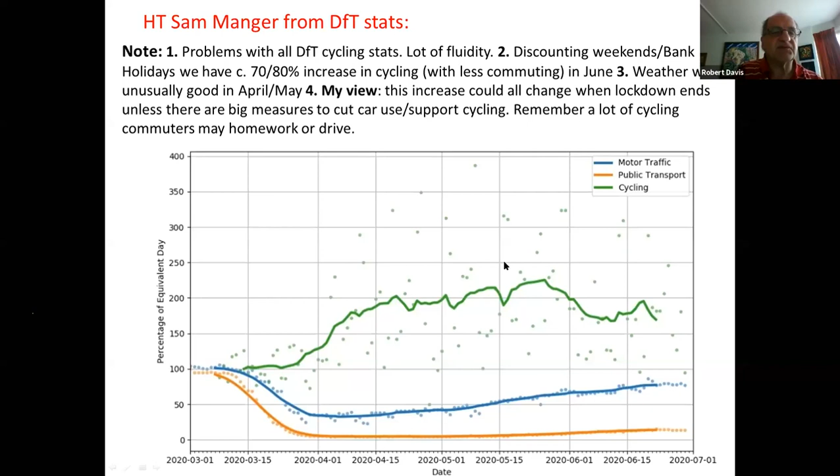Remember, the weather was unusually good in April and May. My view is that this increase could all change when lockdown ends, unless there are big measures to cut car use and support cycling, because a lot of cycling commuters may end up home working or driving. But that's some interesting background stats.

Now, general news, bit of good news. Part 6 of the Traffic Management Act 2004 was activated by the Minister, and that relates to moving traffic offences, outside London. Someone like Mark, if Mark is on board, or Phil, can explain to you exactly what that means. That's what the red asterisk means. So that's a bit of good official news.

The rest of it is still delay. The updated National Cycling and Walking Plan was due for June. The minister responded to Fleur Anderson, I think, member for Putney, saying this summer. The inspectorate we were promised, haven't heard anything more of that. The active travel commissioner in charge of it, again, we haven't heard anything about it. And the update of Local Transport Note 2/08, again, that's this summer.

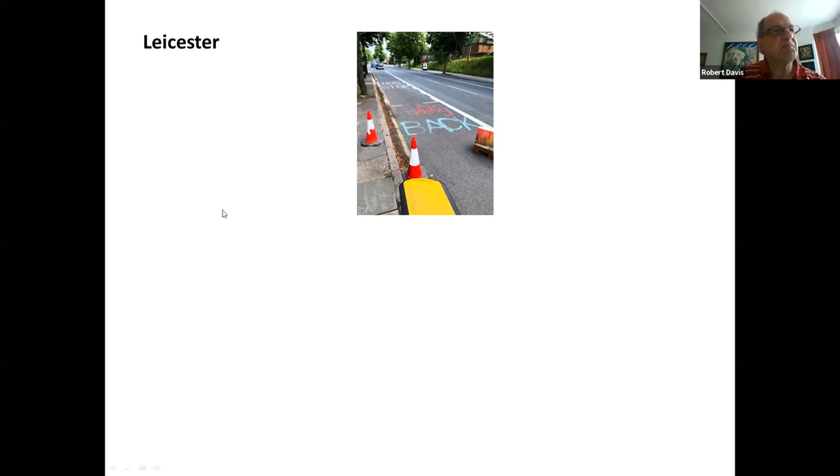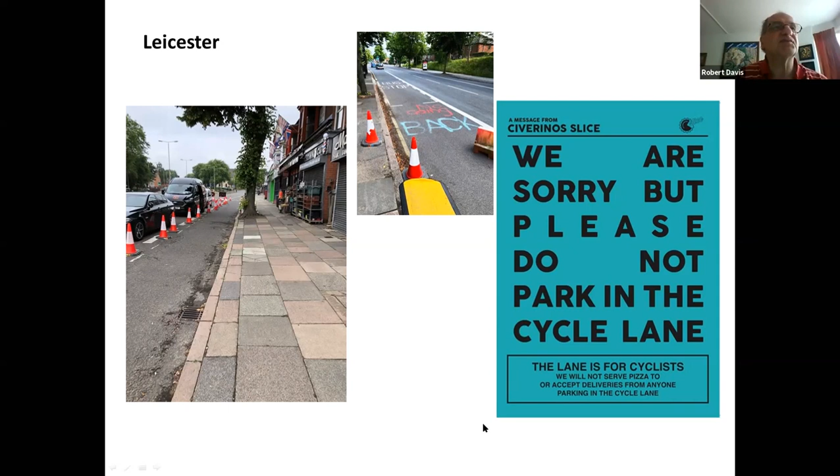Now two other things. Beaumont Leys Lane - I've seen a more recent photograph of this, but here you've got the cylinders and you've got parking on the footway, and presumably locals are driving in through the cylinders to park there. Maybe that's the reason for these cones. I don't know, but the cones do seem to narrow the cycle lane.

Here's an alfresco dining space on the Golden Mile. Various bits and pieces about more space for dining coming out this week.

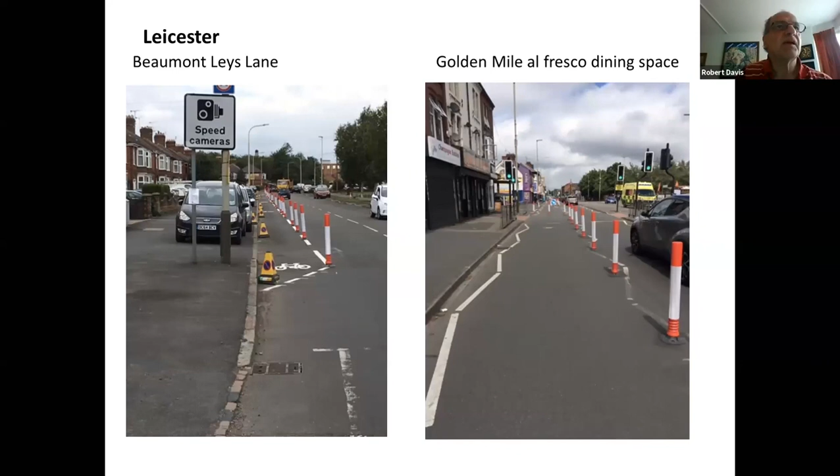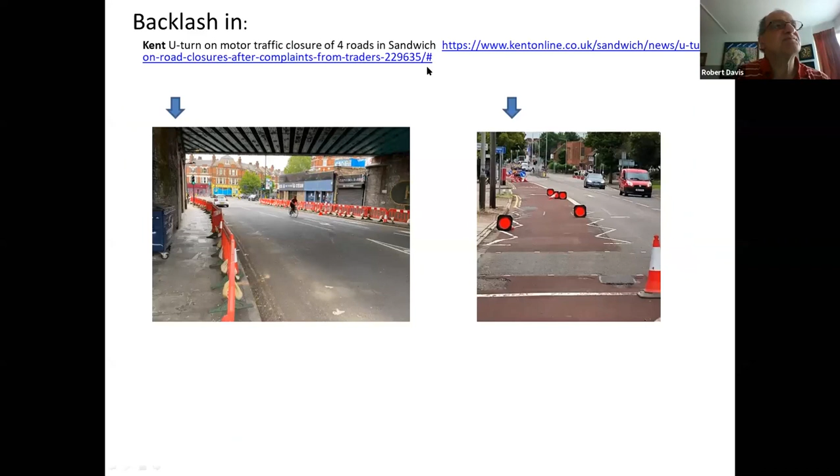Okay, now some backlash stuff. Kent U-turn on motor traffic closure of 4 roads in Sandwich - that's not good. Tower Hamlets, some planters which were put in right at the beginning and signs were taken away, they've now apparently been put back. There's a long story about how it's causing extra traffic to go through a neighbourhood that had been planned for a low traffic neighbourhood, but it's now going to be done differently and it's going to be consulted on. It's a long complicated story, but it's an example of some planters being moved and signs taken away, which we'd seen a few weeks ago in Hounslow.

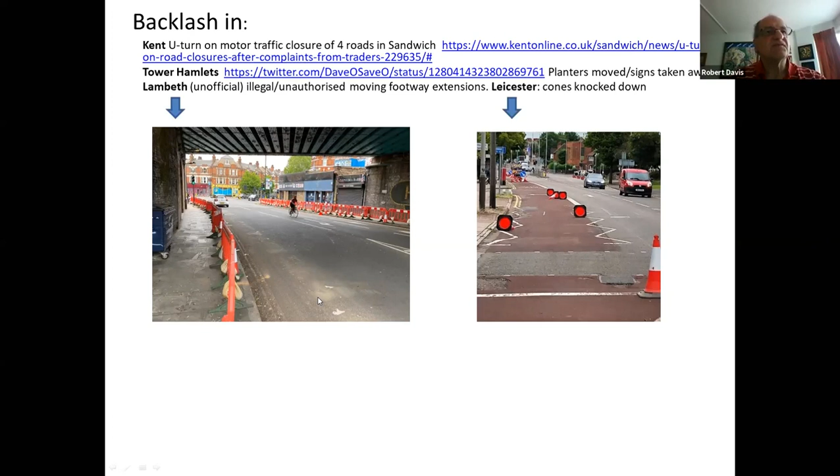Also in Lambeth, something quite interesting happened. You remember one of the first footway extensions was under this bridge at Herne Hill. One day last week, some eagle-eyed activists noticed that these barriers had been put back on the footway. So they contacted the council and said, why have you done this? The council said, we haven't done it, it's been done illegally. So they've now been put back - you can see where they were. So, you know, the price of liberty is eternal vigilance, you have to keep an eye out for that.

In Leicester, some cones have been knocked down either by cars or on purpose, we don't know. I've heard that in Ealing some of the cylinders have been bashed. So bad stuff is happening there, either accidentally or otherwise.

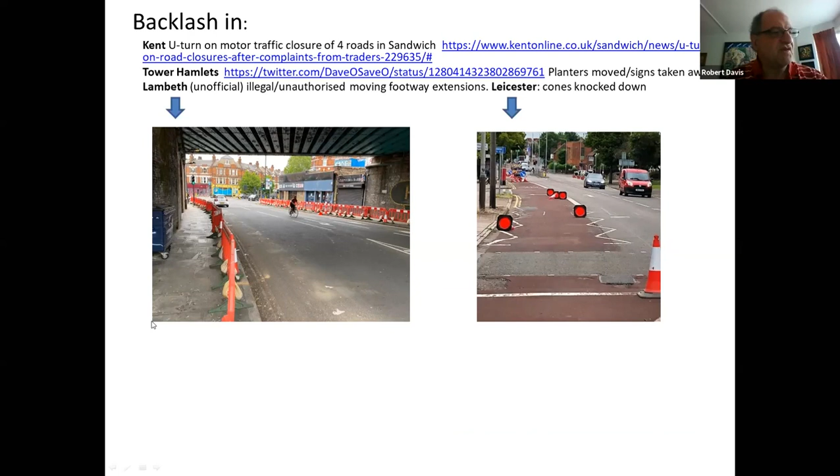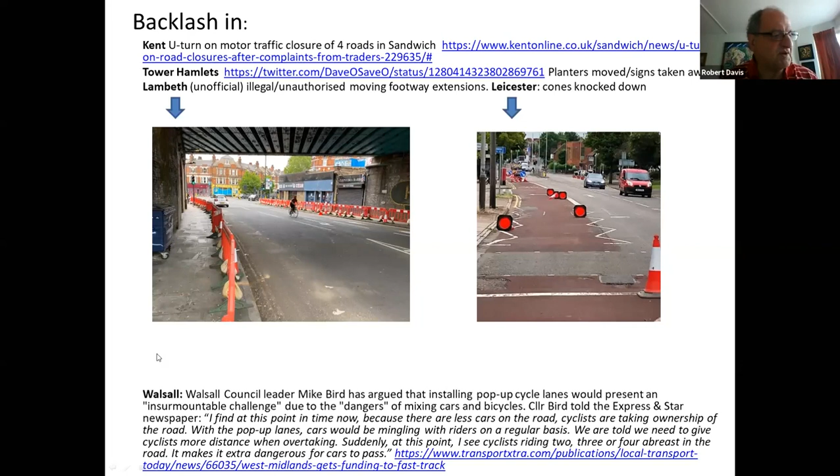Now, I don't know if you know Bez, Beyond the Kerb. He produced - he's still around - a t-shirt which said ride a bicycle and upset the idiots. So here they are. He is the council leader of Walsall, the one council in West Midlands Combined Authority that isn't doing anything. He's argued that installing pop-up cycle lanes would present an insurmountable challenge, due to the dangers of mixing cars and bicycles. Actually, the cycle lanes are to not mix cars and bicycles, but never mind.

I find at this point in time, because there are less cars on the road, cyclists are taking ownership of the road - we wish. With the pop-up lanes, cars would be mingling with riders on a regular basis. We are told we need to give cyclists more distance when overtaking. Suddenly at this point I see cyclists riding 2, 3, or 4 abreast - you don't actually, that's just photographs taken funnily, and you're making it up in the road. It makes it extra dangerous for cars to pass. So don't pass them, you idiot.

And Reigate, yes, the Crispin has been well publicised. Crispin Blunt MP was appalled at the predicted traffic chaos in Reigate - haven't actually seen that. Businesses complained and the pop-up cycle lanes were pulled on the 5th. So there's a bit of backlash.

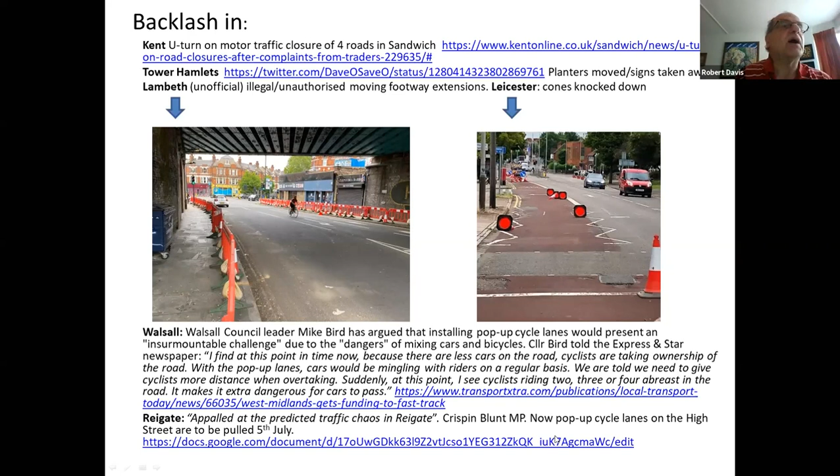Now, a bit of ultra backlash against a low traffic neighbourhood in Ealing. You may have seen this on the news - this is on my old patch, West Ealing. A tree which had some problems with its roots, very shallow roots, just fell over and was recorded on a dashcam. So it's nothing to do with anything the council done, or low traffic neighbourhoods, or anything.

But the MP, Rupa Huq - sister of Konnie Huq incidentally, if you remember her from Blue Peter, and someone I'd communicated with when she wanted some cycle parking at home when I worked at Ealing - put this up saying, scary incident in South Ealing, luckily everyone unscathed, makes this proposed madcap scheme - that's the low traffic neighbourhood - that will gridlock the hood, notice the hood, pretty edgy wording there, and cause mayhem for emergency vehicles even more ludicrous.

And there's a petition there. So here's an intelligent woman grabbing hold of something that's got nothing to do with anything and using it as an excuse to say we mustn't have a low traffic neighbourhood, which almost certainly wouldn't cause any mayhem for anybody, let alone emergency vehicles.

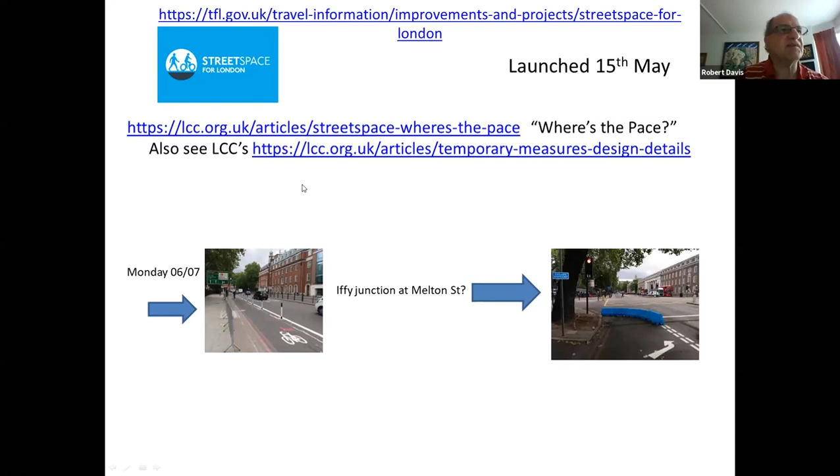Okay, here's London. Don't forget the story's a bit all over the place - do read these LCC articles, I've mentioned them before. On TfL schemes, I was taken to task for being a bit too rude about what had happened last week. Hampstead Road lanes are protected to some extent, and there are extra lengths of protected lanes in roads leading to Hampstead Road. So Hampstead Road and surrounding schemes are a bit better than I might have given the impression of.

And also Euston Road, 660 metres is due to be installed, not just 200. And there's due to be one lane on each side now - that means going down from six lanes to four.

And this was yesterday - here are wands, or cylinders more like, going in. This is eastbound, nice wide cycle lane, got a rave review from Brenda Puech.

Something a bit - this is going this direction, Melton Street, which is the old entrance into Euston. This is a new livery for street space. It's being blocked off - I'm not quite sure why that is, but you have to come out of the lane, go there, and then, or else you can hop off the bike and go across. I'm not sure why it's like that.

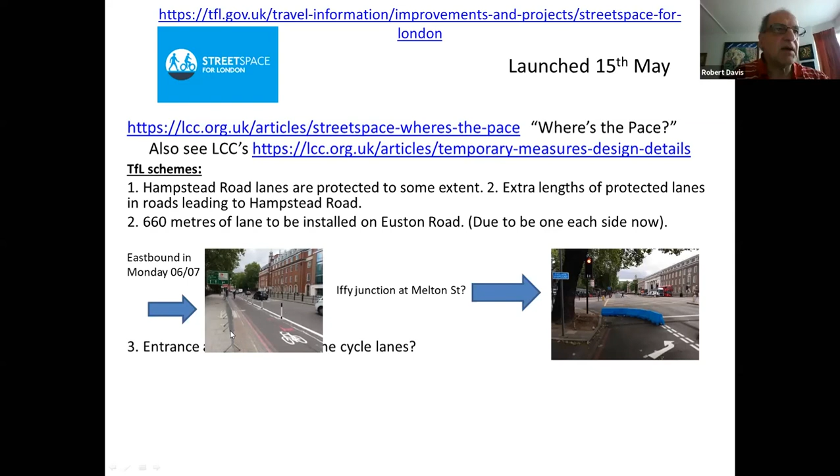Yes, Park Lane, still a bit of a query, not sure about entrance and exit to them. I'd like TfL to get on with trying to do something about Regent's Park.

General TfL policy - Hammersmith Bridge reopening to motor traffic has been paused because of lack of finance. Silvertown Tunnel we're still complaining about. We haven't got smart road user charging on the agenda.

We should have. We want to know more about having good quality cycle lanes so that you don't get left hooked. And what about where there are no cycle lanes and extended footways? So there's still questions about the quality and monitoring required for the temporary infrastructure going in, which we'd like to see talked about.

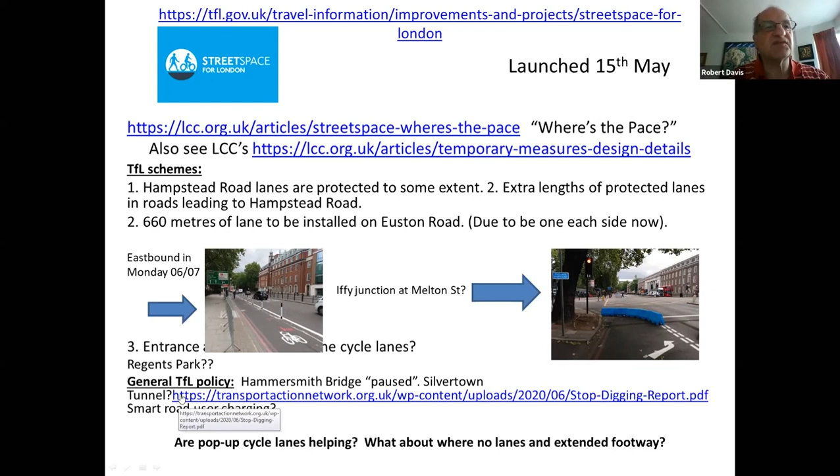Okay, now there are due to be six overall London allocations, a bit complicated, mixing with stuff directly from the Department of Transport. It's taken from Laura Laker's articles and blogs. This is the link for each scheme in London - go to each scheme, you can see there.

Now, what I've noticed is a lot of this is going on school streets, which are good, great stuff, school streets, well done to the people there. But the bad councils who don't really want to reallocate road space seem to be using them as a way of getting funding. And I'm just a bit worried that there are these people who really need to be told off forcefully, who are saying, oh, well, okay, we'll have 3 or 4 schools out of their 30, 40, 50 that will get temporary road closure every day, a couple of times. And that's not really what we should be talking about. We need something more fundamental than that.

Here's what's happened with the boroughs under what I think is the 5th of 6 allocations. There's still one more tranche of allocations, quite a big one, to come later this week. And that could be the game changer for London.

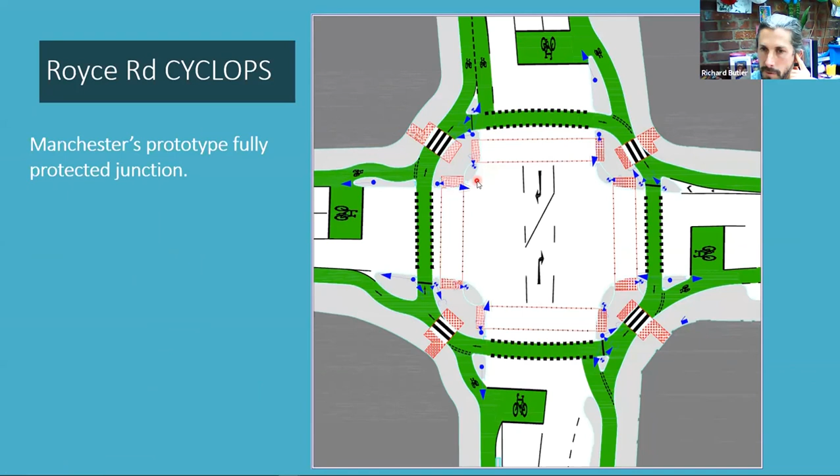There's Royce again, sorry about this. This one is a slightly skewed variation of Royce. It's actually essentially the same, but a similar kind of scenario. Sorry, I should have done my homework here, really.

That's the scenario where we can get a diagonal crossing. So you can see straight away the benefit of the orbital cycle track is that you can do more complex things inside the junction. This has got a diagonal crossing, which you won't be able to do if the cyclists were on the inside. So that's one sort of variation in terms of complexity.

This is the Bolton job that's being switched on, hopefully within the next few months. It's being built as we speak, and this definitely has a more complex internal arrangement. The cycle track goes all the way around the outside, that's the key feature. The Cyclops goes all the way externally, and it's actually quite a skewed crossroads, this, where the side arms run separately.

In terms of getting this to work from a business case and traffic capacity perspective, we needed to minimize the impact that the pedestrian phases had on the junction, hence we required these triangular islands, staggered islands, and whatever else for pedestrian traffic, but we still managed to get the cyclists around the outside. So again, that's the sort of key feature there.

Because the cyclists have shorter intergreens compared to pedestrians, since they're moving faster, we can allow for the cyclists to go across in one entire movement, from one side of the carriageway to another. We can cater for those in terms of timings, where we won't be able to do that with pedestrians. So in terms of junction efficiency, we might have to stagger pedestrians, but with cyclists, we can go straight away over in one hit because their intergreens don't have to be quite as onerous as pedestrians'.

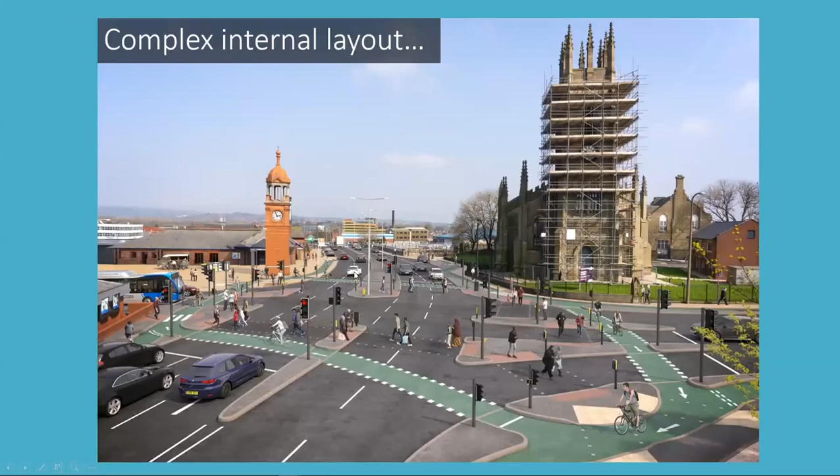While you're there, I've just been looking at the questions that are coming through. We've got a professor on the line who'd quite like you to talk through the staging on the Royce Junction, particularly the funkier elements that you're doing with how cyclists are detected. Is that okay? Yeah, no worries.

I'll bring up an image of Royce then from the top. This might be best because it's indicative rather than, you know, this is the original sort of CAD drawing that it was based on. So I'm just seeing it.

Have we got the chat up that I can read there? Is there any specific questions, Brian? Sorry, was it about the staging specifically? Yeah, if you could just run through how it operates, who goes where, who does what, and particularly some of the detection stuff that's going in there. Right, yeah, okay, no worries.

Okay, so in this one here, in the Royce Road example, we've got a 3-stage junction, so it's hopefully as simple as some of these Cyclops will get. East and west would be traffic, the 2 traffic phases in one stage - let's call that stage 1, east and west on the main road. Stage 2 is the pedestrian stroke cycle stage, so the cyclists and pedestrians all get a green in the same stage.

The controlled pedestrian facilities are on the inside of the ring and the controlled cycle facilities on the outside, which are dedicated red, amber, green full traffic signals for cyclists. So they all run in the same stage - let's call that stage 2. And then finally, stage 3 would be the side road, what appears to be north and south from this image.

Because it's a gyratory roundabout for cyclists, if you approach as a cyclist from the west side, you would give way to any cyclist on the roundabout, meaning you're bypassing that signal. So from a cycling perspective, to access the cycle ring, you're not under signal control. You can come through and join the cycle gyratory at any point, irrespective of signal control.

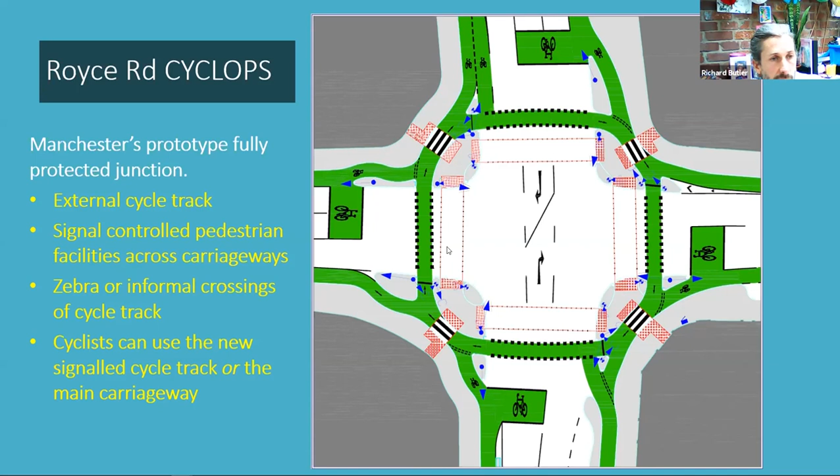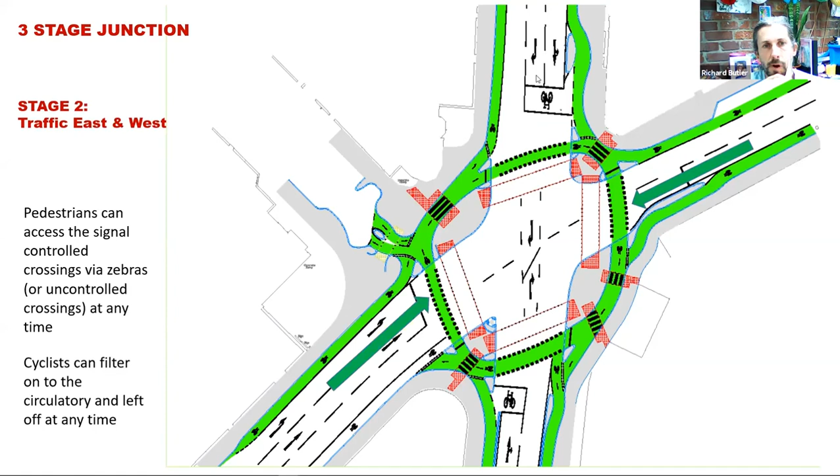I can bring up a slide further forward which has got that staging shown for the similar Brooks Bar junction just down the road. This is a bit more graphical here. So you've got stage 1, traffic north and south. Stage 2, traffic east and west, for example. And stage 3, this is when all of the pedestrian and cycle facilities get to green at the same time.

But like I said, from a cycle perspective, it's also a roundabout with priority elements to it. So you're signal controlled at the conflict with the road, and you're giving way to other cyclists on the gyratory, or you're giving way to pedestrians at the pedestrian crossing.

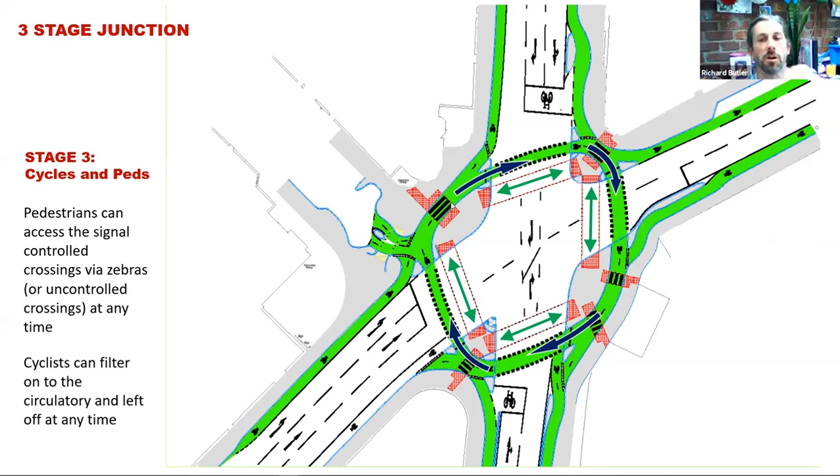Any specific questions on those elements? John, have you got anything to add to that? Can you talk about the detection, because a lot of people have been asking about whether you need to push the button and how it works on the detection? That's something I forgot about, apologies Brian. That came up on Twitter.

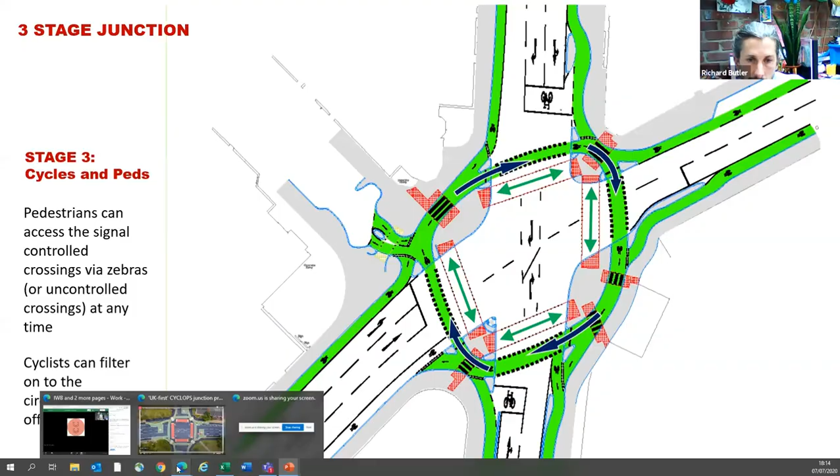Let me see if I can bring up the Royce Road junction again in the drone image.

So detection wise, we've got push buttons at the stop lines, which I know everybody's not so keen on, but they are as much as anything for backup purposes. So we've definitely got a push button for cyclists at the stop line itself.

We are intending to install piezo loops, which detect cyclists on the approach, predominantly for the main road. We were less concerned about the side road because this is a heavy cycle route in and out of Manchester, with cyclists definitely coming from the side roads, but not to the same numbers. On the main road, we intend to place the piezo loops about 20 or 30 metres back, around where that cycle symbol is, and that'll put in an advanced demand for this cycle phase, which in turn actually demands the entire cycle and pedestrian stage. So if the pedestrian cycle stage comes in, all of the phases constituent to that stage will appear. If one cyclist demands this phase via the piezo loop, for example, the whole lot will come in anyway, which obviously benefits anybody else arriving on different arms that may not have activated a loop or pressed a button.

So that is the intention, which hopefully we're going to get installed in the next few weeks. We're a little bit behind on that, unfortunately. It's worth saying that's not installed yet at the Royce Junction, that's currently not operating. So in the future, that will be an advanced demand and extension for cycle phases. Now, in terms of installing them upstream of the gyratory, you've kind of got to think about where the cyclists are likely to go.

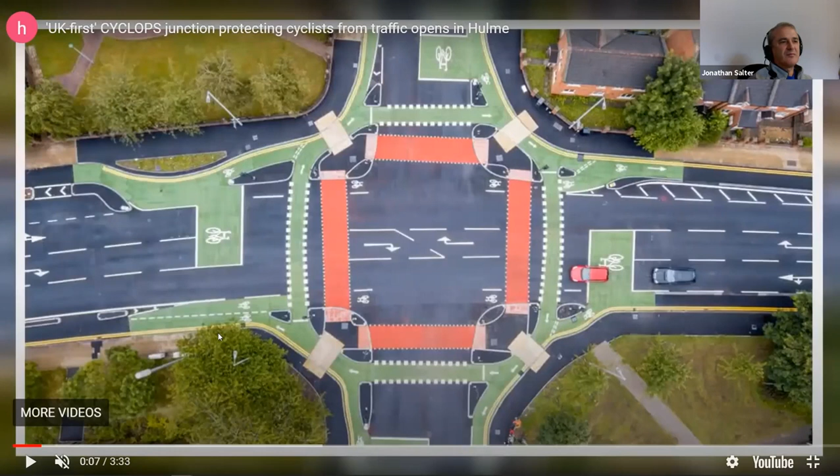There's definitely ways of being more economical with space, and we've had to show that on less forgiving junctions. We've got quite a few examples of really small Cyclops on single lane approaches on every arm, where you don't have the luxury of always having a footpath around the back. This junction is the ideal scenario, with a footpath at the back on each corner and enough capacity for a full ped stage and full cycle stage. It's a really good example of the first one done like this. We've got over 30 more Cyclops junctions we've designed, some on quite small footprints, which we can share with people if they inquire.

All right, I might start winding it up now, because we've subjected you to enough. I'm going to turn my video on for one last go, so I can do my round of applause to Richard and Jonathan for, I think, doing one of the best junctions ever in the UK. It's stunning, and I'm really excited to see all the other ones coming through. That's my round of applause. We might wind it up a little now, and I'll see you next week when I'll have a more stable connection and you can see my face - I'll even have a shave and not be in my beach gear, how about that, even though it's been raining all day. But big thanks, chaps, and thanks to the other speakers as well.

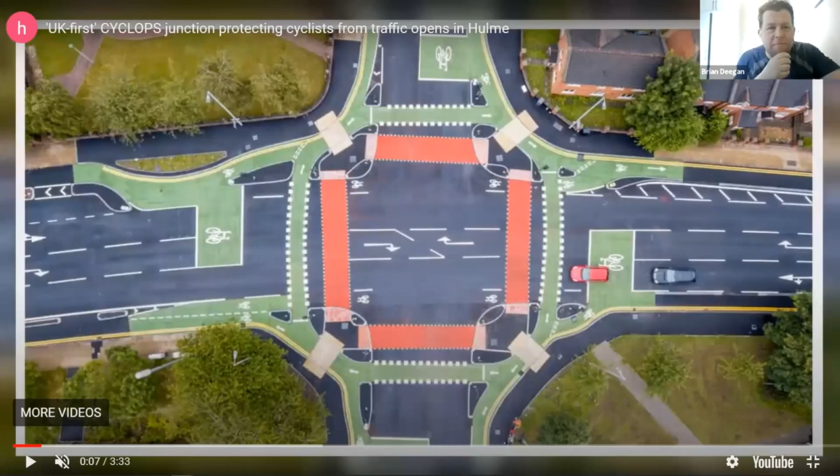Should we call it a day there, unless anybody's got anything super vital at the last second? No, we're all... Who invented it? Whose idea was it?

That's an interesting one. Well, those two guys there, as far as I'm concerned, Richard and Jonathan, they're the inventors. And Dave as well - to be fair, it was a collaborative partnership between me, Dave, John, and Brian, who joined later and gave added impetus and political clout to it. So we've all been part of the process, and it's definitely not something that just suddenly appeared in someone's head. It took a long time to come to the adaptable template we've seen here.

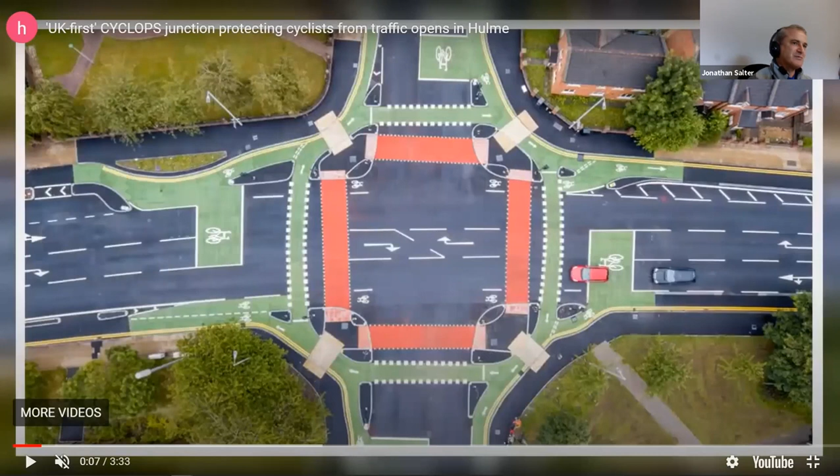The key was putting the cyclist on the outside of the pedestrians, which from a signal staging perspective gave us a lot more opportunities to always run the cycles with the peds, and more opportunities - not just in the classic crossroads full ped stage, but in lots of other scenarios - to have complex junction arrangements and signal staging within the external orbital ring. So yeah, it was definitely a long process to develop it.

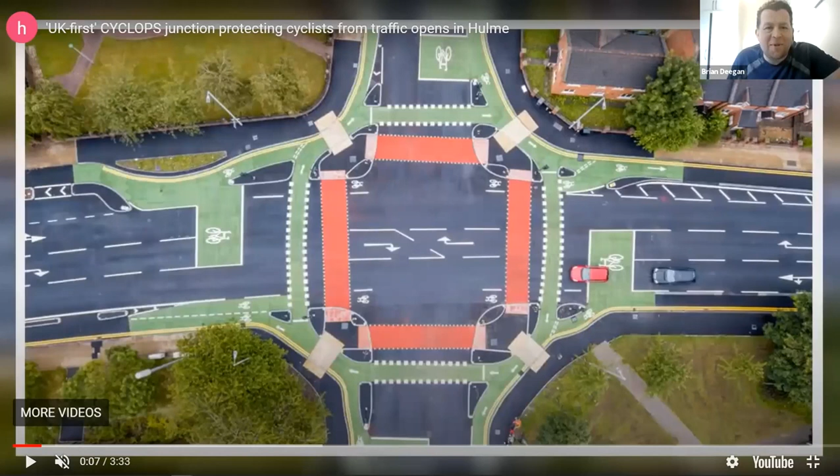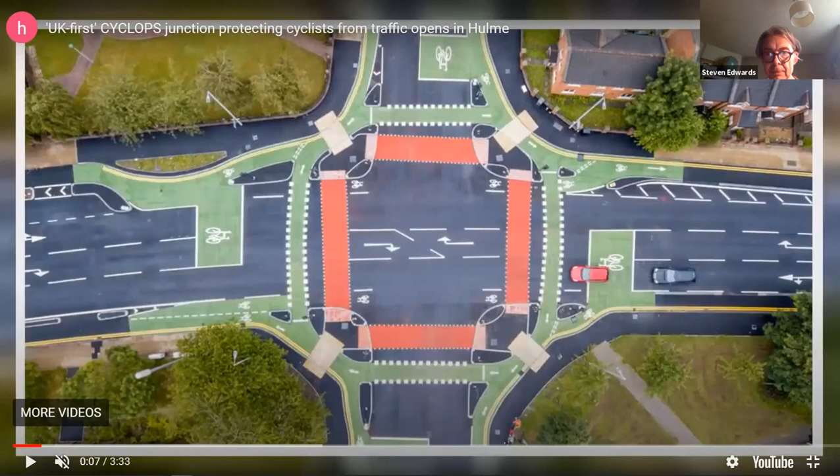I'll give a shout out to Dave Stevens. I'm not sure what happened - he came in and ruined Bob's thing, and then jumped off again. Dave had the presentation, so we've had to wing it a bit. Dave's a real character as well, and a good person to approach for further detail if you can't get hold of us three - a few people have been asking about that. There's also the technical note on the TFGM website written by the four of us to help out, so hopefully we can do a bit more. And John Parkin, Professor, has already said he's putting it in his next book. So fame at last - well done, everybody.